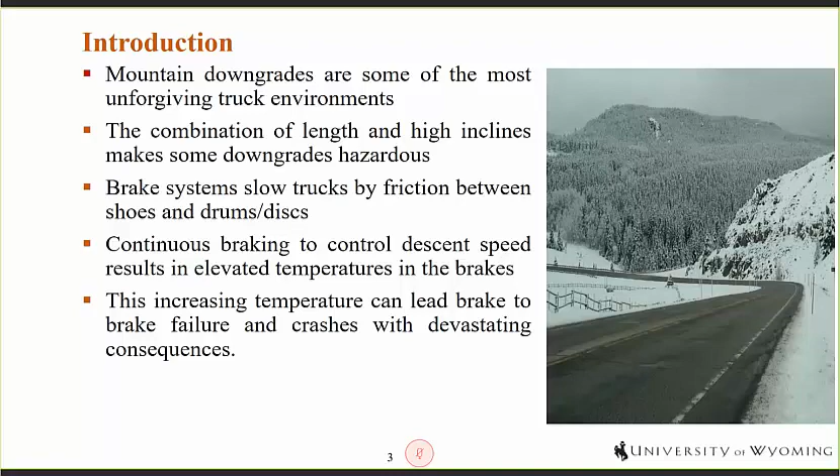To dissipate the energy which comes about as the truck is moving, brakes have to slow the trucks down using friction. So they convert kinetic energy, which is converted to heat energy and dissipated into the environment. However, this continuous braking results in very high temperatures for the brake systems, and this has the potential to lead to brake failure, due to the brakes heating to such an extent that braking capacity is totally lost. Crashes resulting from brake failure on steep downgrades are known as runaway crashes, and they are often devastating.

So this is an example of a runaway crash. This happened in China. Here you can see that the truck has lost complete control. The driver is no longer in control of the truck, and this crash led to the death of 5 people. Our research is aimed at preventing these sorts of runaway crashes.

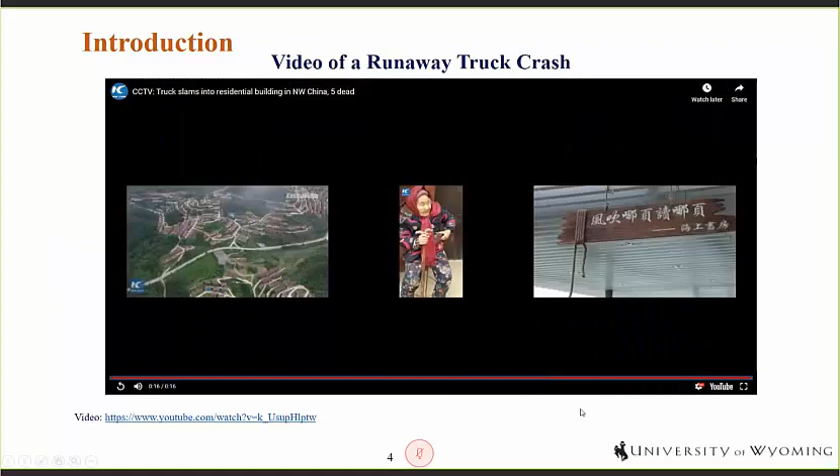So here in the US, there have been recent runaway crashes. On April 25th this year, there was a runaway crash in Denver, close to Lakewood. This crash resulted in the death of 4 people. A 23-year-old driver who was driving a semi-trailer lost his brakes, and the truck gained a speed of 85 miles an hour in a 45 miles an hour speed zone. There was a slowdown of vehicles, unfortunately, and this truck crashed into the traffic, and there was a 28-vehicle pileup leading to the death of 4 people.

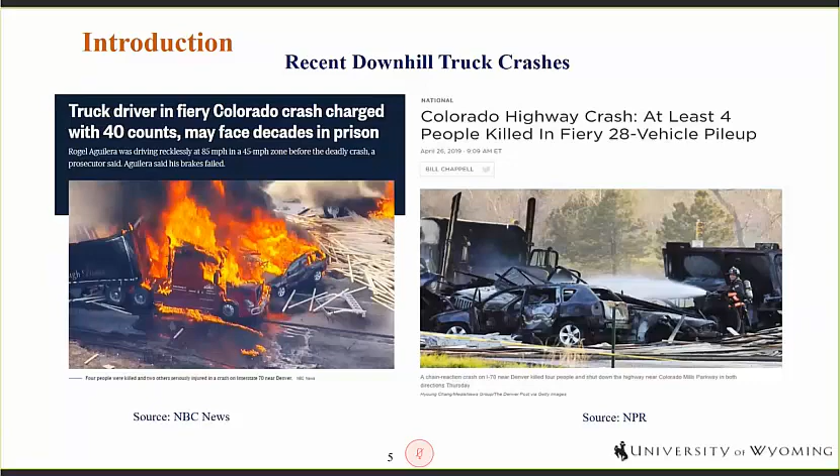In Wyoming, on October 1st this year, there was another crash. A truck coming from Idaho loaded with potatoes and onions lost his brakes. Unfortunately, the driver couldn't use the gravel ramp, neither could he use the cable catch net system because it was under repairs. So the driver crashed into a WYDOT sand shed. The cab of the truck detached. Fortunately, the driver sustained minor injuries. There were no fatalities in this incident.

You can also see another crash, of a tanker that rolled over on US 14A. That was some years ago. Also this year, you had 2 semi-trailer crashes in Woods Landing in Wyoming, and this happened within a space of a month, and the second semi-trailer crash led to the death of a driver. So what I'm trying to show here is that runaway truck crashes are often devastating. They have a very bad impact on lives and property.

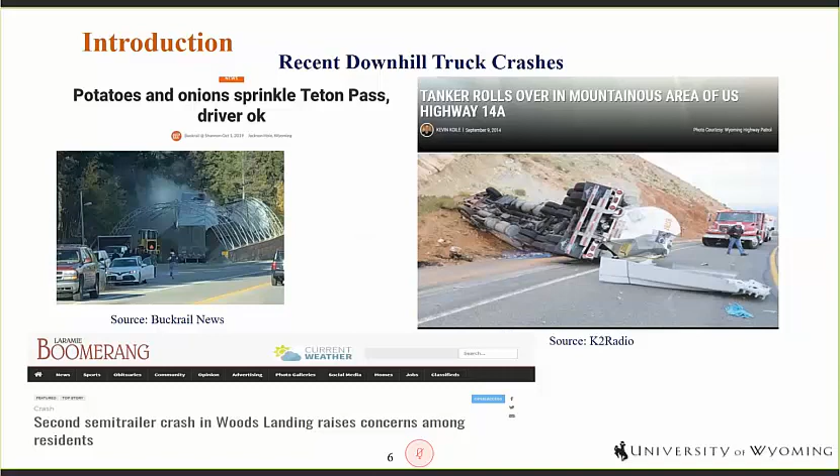Trucks have a peculiar problem when they descend steep downgrades.

High temperatures increase the risk of brake failure. These temperatures cause drums to expand—this is for drum brakes. So you have the drums expanding, becoming distorted in shape. The outer part of the drum expands so much that the drum takes on the shape of a bell.

This is known as bell mouthing. And as this distortion continues, the available distance for the brake lining and brake shoe to travel increases. This means there isn't great contact between the brakes and the drum surface, meaning there's a loss of braking efficiency as this continues.

This phenomenon is known as brake fade. And as brake fade continues, the truck gains speed, which becomes uncontrollable, and a total loss of control may occur, just like what you saw in the video—those sort of bad runaway crashes.

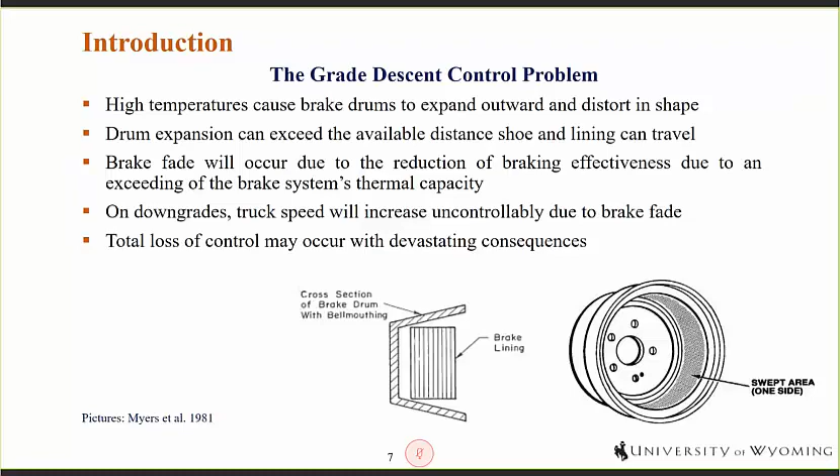So to counter the incidence of truck runaways on downgrades, grade rating systems have been developed since the 1950s. What these systems are meant to do is inform drivers of upcoming severe grades, and enable drivers to modify their behavior, such as selecting low gears and appropriate speeds to descend these steep downgrades.

Previous rating systems have included the Bureau of Public Roads rating system developed in the 1950s, the Hyke's grade rating system developed in 1963, and the Lill's grade rating system developed in 1975.

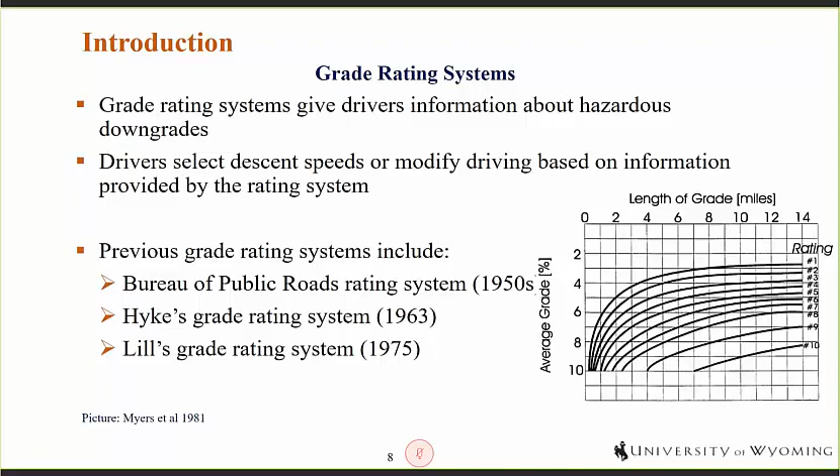However, some of these previous rating systems were considered to be arbitrary, and variations within grade categories created confusion among drivers. Important variables such as initial brake temperatures, ambient temperatures, and heating and cooling characteristics of the brakes were not considered in some of these systems.

And for a lot of the previous rating systems, drivers were still required to use their experience to safely travel over steep downgrades.

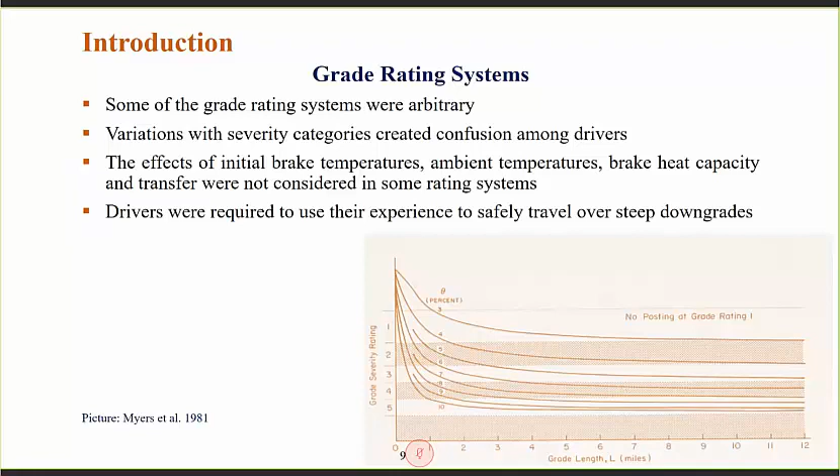So in the late 1970s, the Federal Highway Administration initiated a research project to develop a grade severity rating system. This rating system used a...

related brake temperature to the speed of a representative truck, such that when a truck chooses a particular speed and descends a steep downgrade, at any point within the downgrade it will still have enough braking capacity to safely descend that downgrade. This was accomplished through the use of weight-specific speed signs.

Importantly, this GSRS model considered truck weight, the physical characteristics of the downgrade, and the heating and cooling characteristics of the truck brake system. It also considered environmental conditions which would affect the brake system temperature.

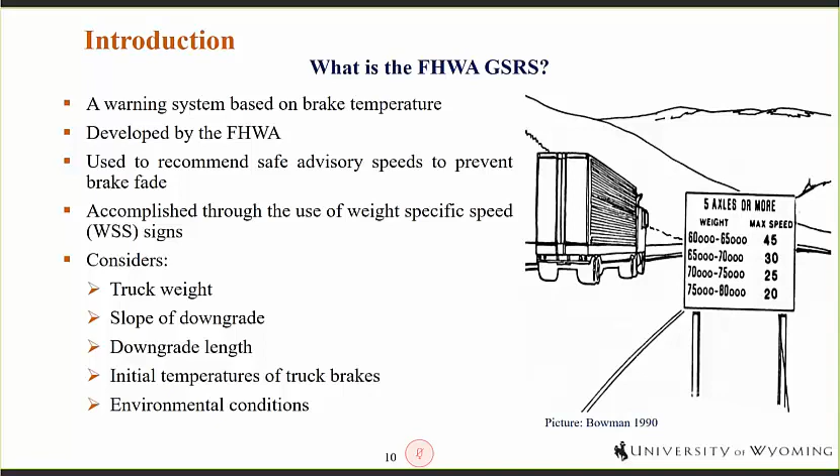However, in the intervening decades since the GSRS was developed, efforts to conserve fuel and reduce gas emissions have led to radical changes in truck designs. Right now trucks are more streamlined.

They have reduced frontal areas. They also have lower rolling resistance due to the change from bias ply to radial tires. They also have lower engine friction.

What this means is that retardant forces which were available to trucks in the 1970s and 80s have now been reduced substantially, to a point that the brakes have to do a lot more of the work.

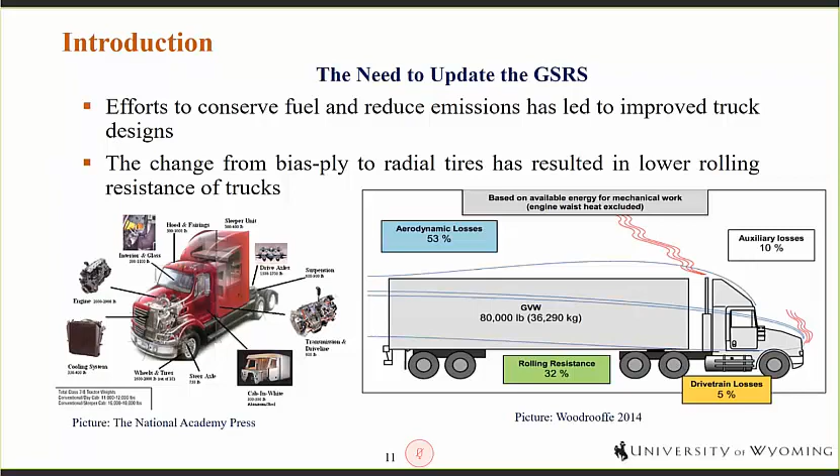On the other side, truck brakes have been enhanced due to the federal reduced stopping distance mandate. This mandate required trucks to reduce their stopping distances by up to 30% for new models of trucks by the year 2013.

Also, engine horsepower and braking forces from truck engines have increased over the decades. They are now between 400 to 550 horsepower. At the time the grade severity rating system was developed in the 1980s, the retardant horsepower was about 170. Right now you have retardant horsepower which could be as high as the thrust horsepower of these modern trucks.

So the objectives of the study. It is essential to know that this research was a comprehensive study of mountain pass safety in Wyoming. However, for this research I'm going to be focused mainly on updating the GSRS.

Our first objective was to update the GSRS to reflect current truck population characteristics and make recommendations for implementation. The second objective was to evaluate mountain passes and their warning systems with regards to downgrade truck crashes. For this presentation I'll give highlights about our findings for the second objective, but I'm not going to go so deep into it.

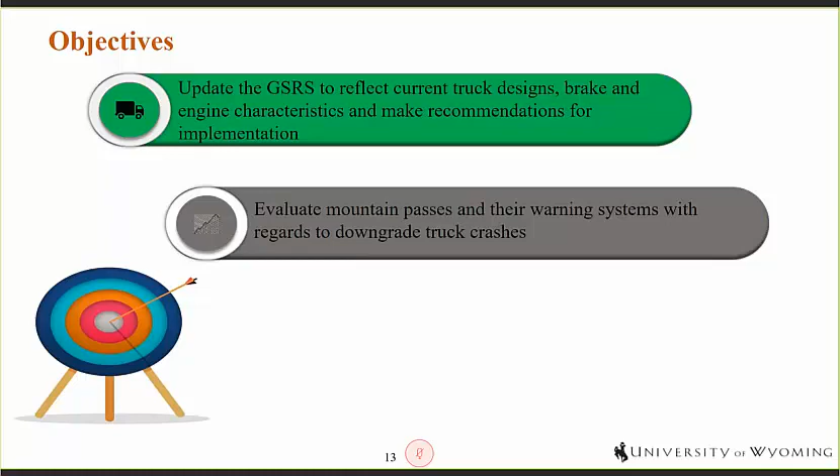So to the research task. First, we had to select a representative truck. We had to develop a testing protocol for field testing, instrumenting the test truck, undertaking the field test, and updating the GSRS to determine maximum descent speeds and make recommendations for implementation.

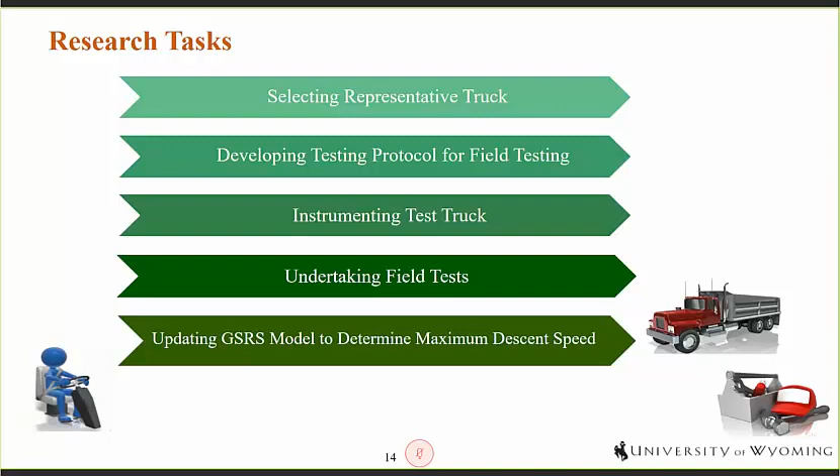So to the first task, selecting a representative truck. We selected a single trailer 5-axle truck. This choice was made because this truck configuration represents about 60% of trucks on US highways currently.

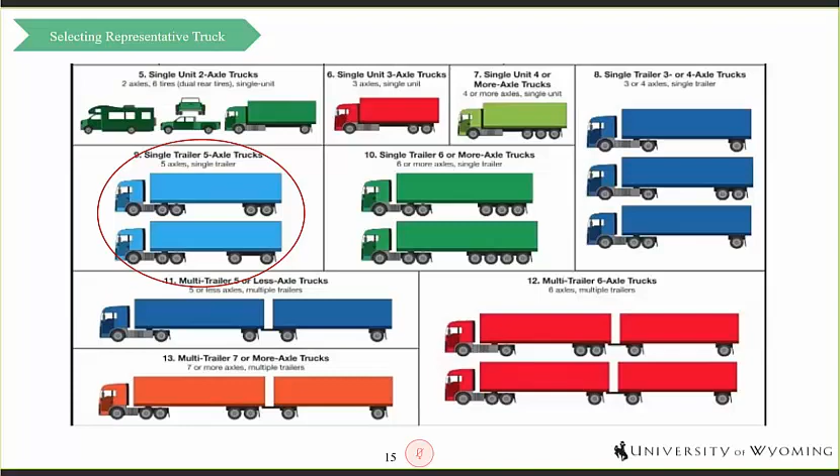Our test truck was a Kenworth T680 series, 2016 model, with a 13-speed transmission. The trailer was a Hyundai trailer van with a gross vehicle weight rating of 65,000 pounds. The test engine was a Cummins ISX-15 engine, 2013 model, with a horsepower of 550.

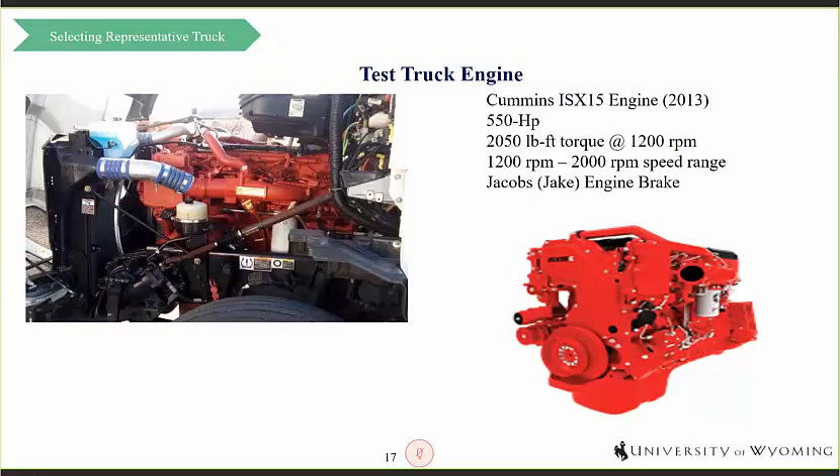The operating speed range was 1,200 to 2,000 RPM, and it was fitted with the compression engine brake, also known as the Jake engine brake. The truck was fitted with Bendix air disc front brakes for the steer axle. All the other wheels had Castlite S-cam drum brakes for both the tractor and the trailer.

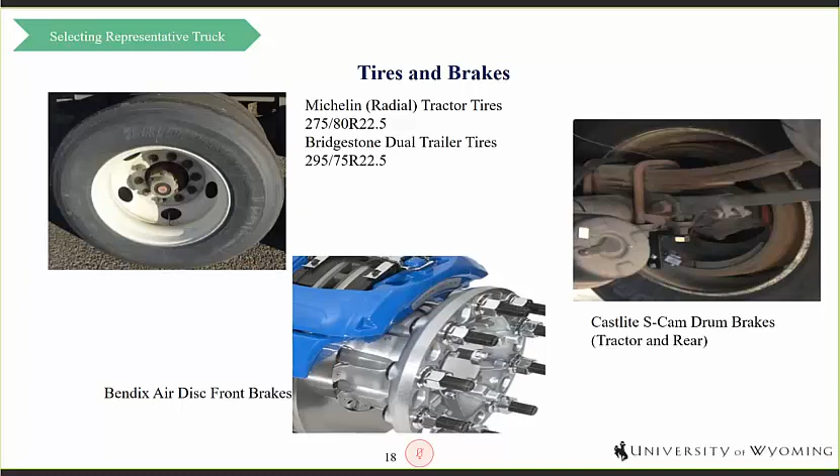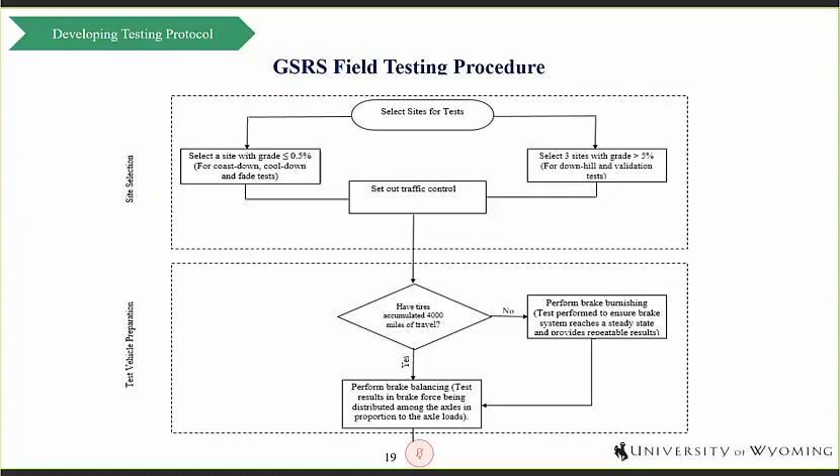So to the testing protocol. We developed a testing protocol to guide us during our testing procedure. This included procedures for site selection, test vehicle preparation, and the actual test procedure. I'll talk about the test procedures in a moment.

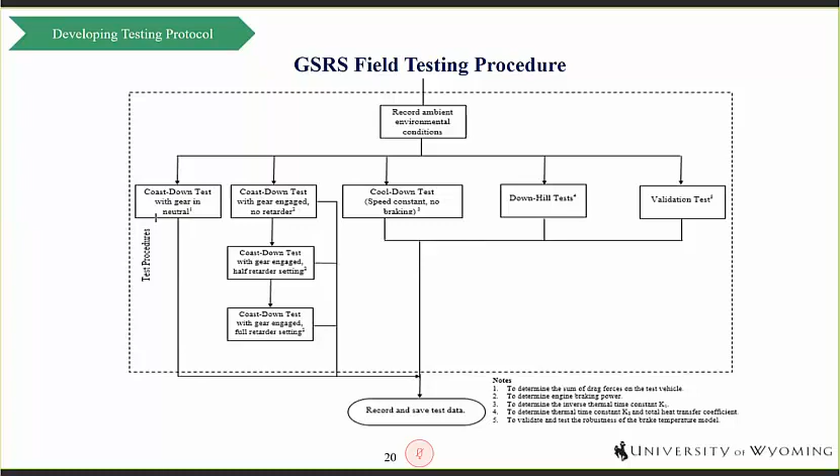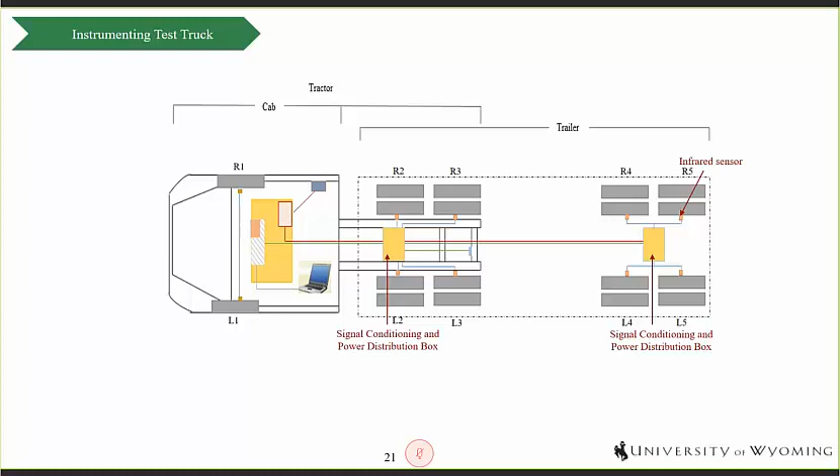To instrument the test truck, we installed infrared sensors on all 10 brakes. We also installed signal conditioning and power distribution boxes on the tractor and the trailer. What these were meant to do was collect information from the infrared sensors and also deliver power to these sensors.

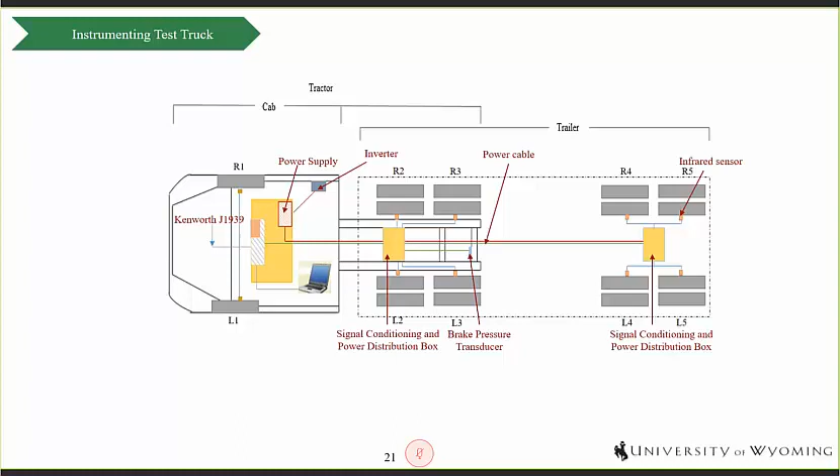There was another conditioning box in the cab, and power supply was provided by the truck. There was also communication with the truck engine to get some important variables, and a brake pressure transducer to measure the application pressure during the test.

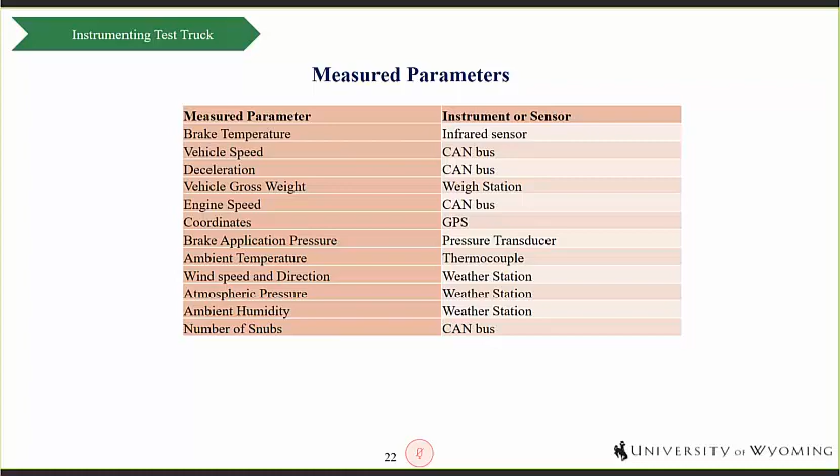So all the data was collected to the controller box in the cab, and this was connected to a laptop running proprietary software where we collected all the data. These are the parameters we measured during the test: brake temperature, vehicle speed, deceleration, gross vehicle weight, engine speed, GPS coordinates, brake application pressure, environmental conditions, and number of snubs.

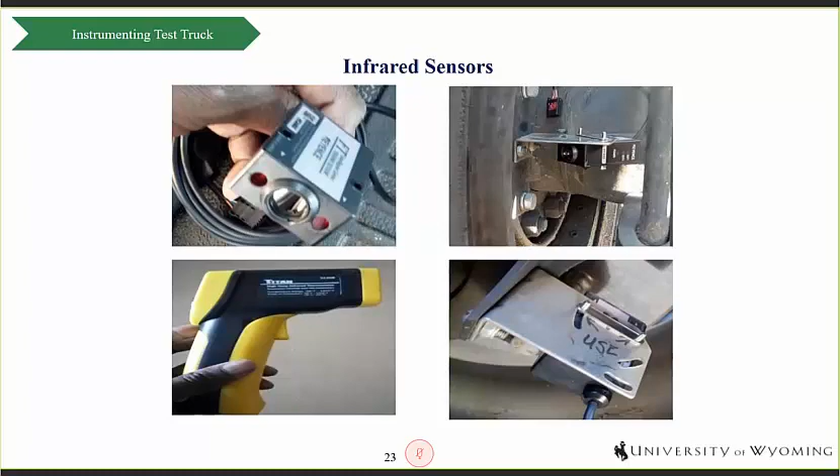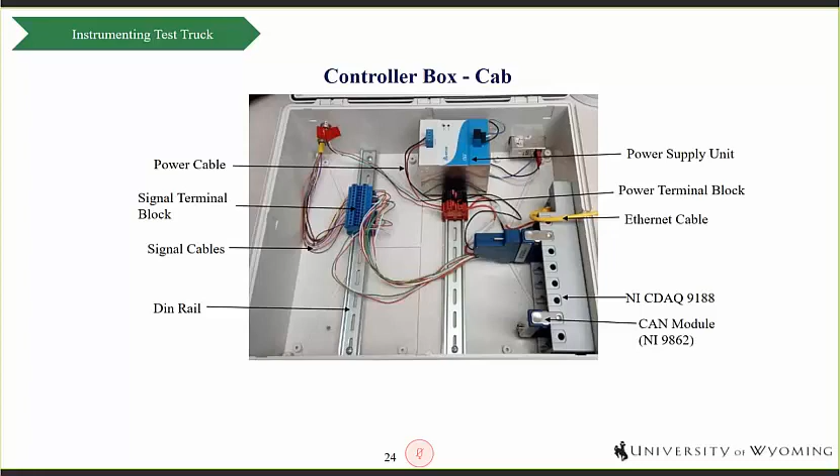Here on this slide you see the infrared sensors. We also had a handheld sensor to first calibrate the sensors and validate readings from them during the test. This is the controller box installed in the cab, which collected data from the signal conditioning and power distribution boxes on the tractor and the trailer. This is the signal conditioning and power distribution box installed on the tractor.

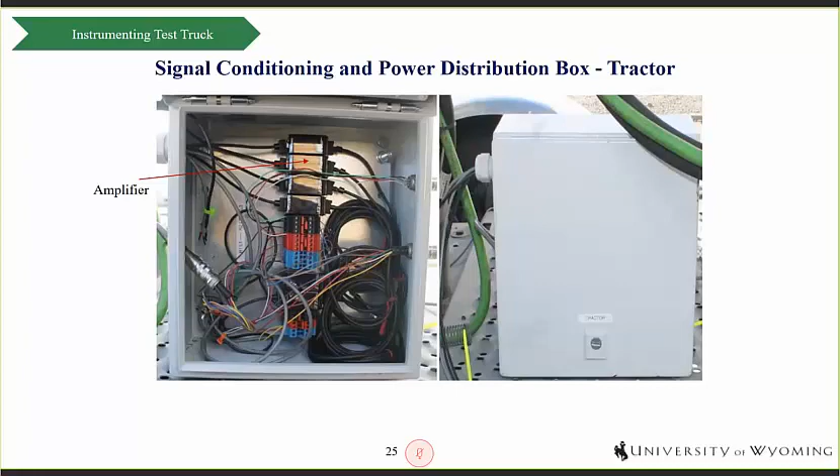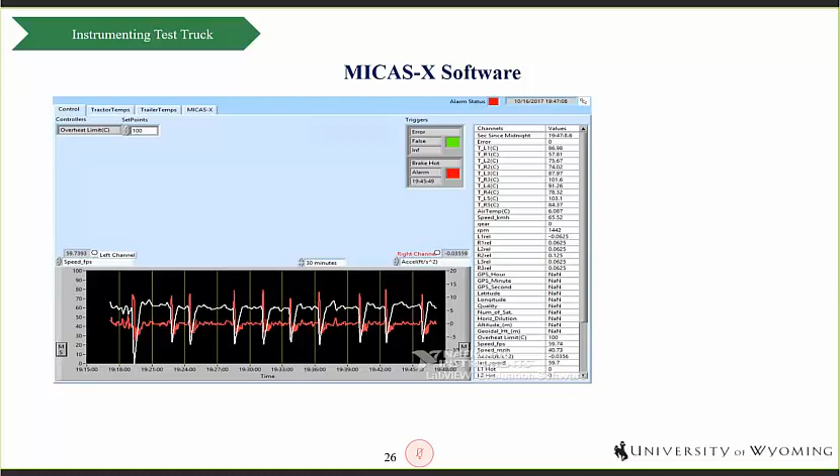And this is the laptop running the MICAS-X software, a proprietary software. It allowed us to see different parameters as the test was carried out. On this slide we could see the speed and the acceleration of the truck in real time during the test. And here we could also see the brake temperature for ten of the brakes of the truck. For our loading, we used crates of water.

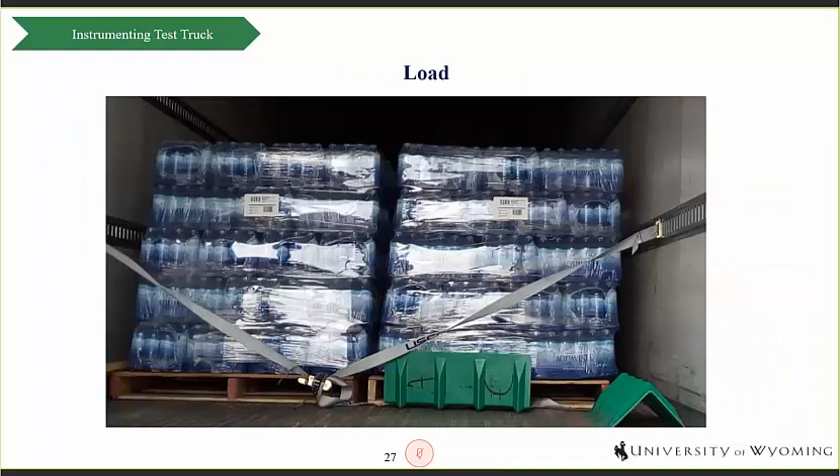So now to the field tests, updating the GSRS. We conducted 3 main tests: the coast down, cool down and hill descent tests. The coast down test was meant to measure the sum of the drag forces acting on the truck. The cool down tests were meant to measure the cooling characteristics of the truck. The hill descent tests were meant to define the heating characteristics of the truck.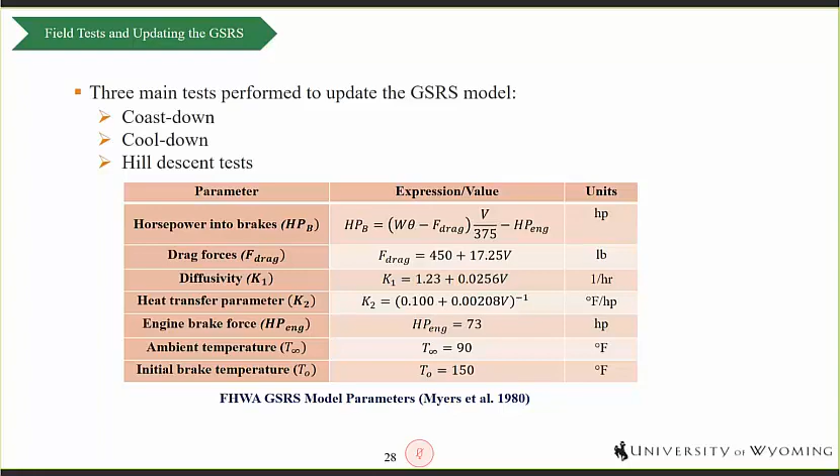Also on this slide, you see the GSRS model developed in 1980 by the FHWA. These are the model parameters we updated in this research.

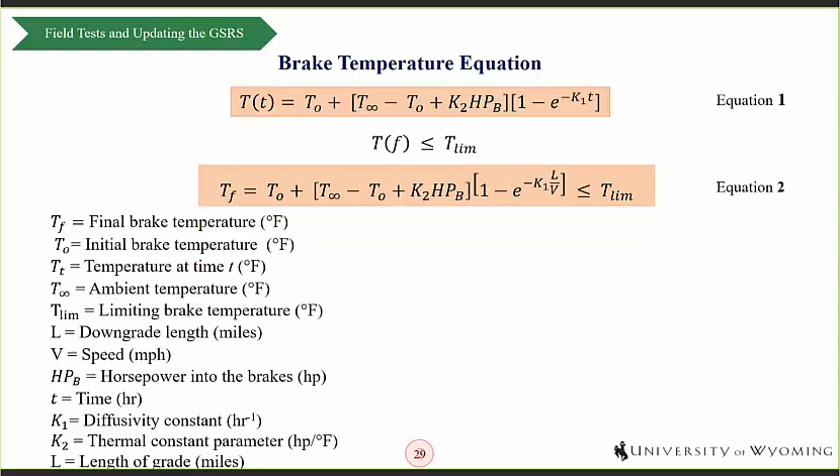Before we proceed, I'd like to talk about the brake temperature equation. This equation relates brake system temperature to the speed of a truck. This temperature model is meant to define a certain speed such that the speed at the bottom of a downgrade always results in a brake system temperature less than or equal to a predefined limiting temperature, as defined in equation 2. That is the basic concept: defining a certain speed such that the brake system temperature never exceeds a certain predefined limiting temperature.

I also have to talk about the required braking force, an important concept in the GSRS model. Consider a truck of weight W on a grade of slope theta. If the truck is in motion, there are some drag forces acting on it: aerodynamic drag, powertrain drag, and rolling resistance drag. There's also drag from engine braking and resistance from the engine itself. These together are known as the non-brake forces.

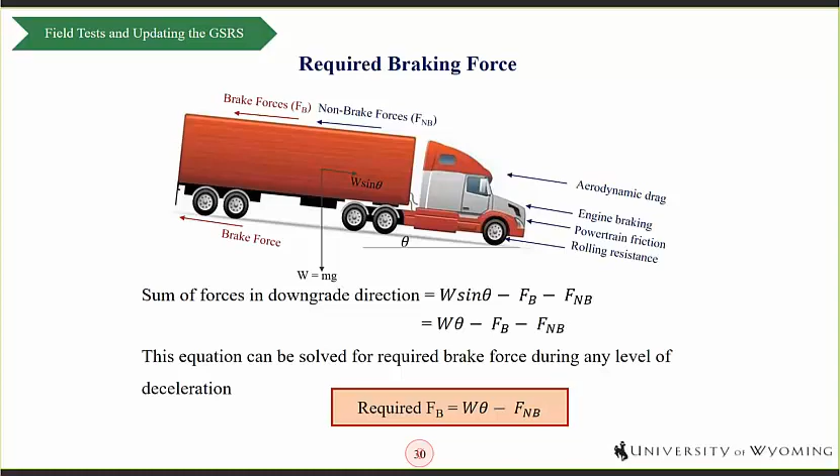To keep the truck at a controllable speed, the driver applies his brakes. This is known as the brake force. So if we sum forces in the downgrade direction, we have W theta minus the braking force minus the non-braking forces. From this we can derive an expression for the required braking force.

So now on to our first field test. The first test we conducted was the coast down test. As I mentioned previously, this was to determine the sum of the drag forces acting on the truck. We used field tests, and we also had to supplement this test with simulation tests, conducted according to the Society of Automotive Engineers J1263 and Environmental Protection Agency standards.

So two different tests were conducted. First, we conducted the tests to measure the sum of the drag forces, and also we had to define the engine power absorption characteristics of the truck.

So with the coast down test, what is done is the truck is driven to a predefined speed on level ground. The truck is put in neutral, and then it is allowed to coast to a stop from the predefined speed. The gear is in neutral to measure the sum of the drag forces, and to measure the engine power absorption characteristics, the engine brake is engaged along with the truck gears for this second test.

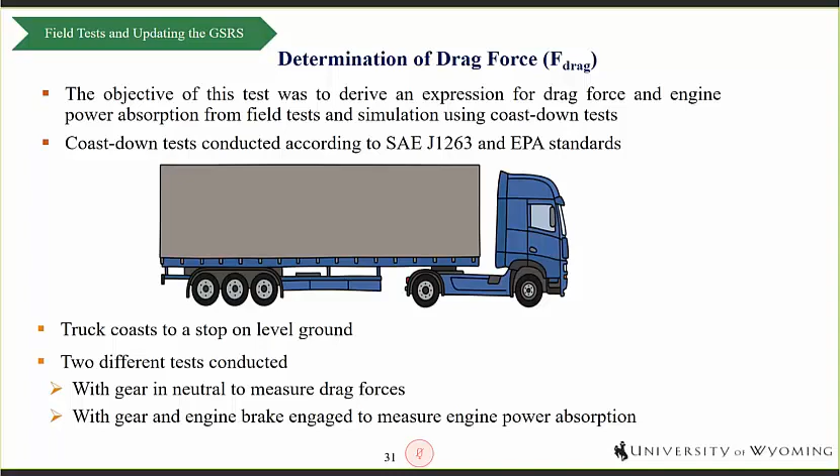So the drag force is calculated according to Newton's law of motion. This equation is modified to account for the effective mass of the truck, and to also account for the slope of the test track. These are regressed against drag coefficients A sub m and D.

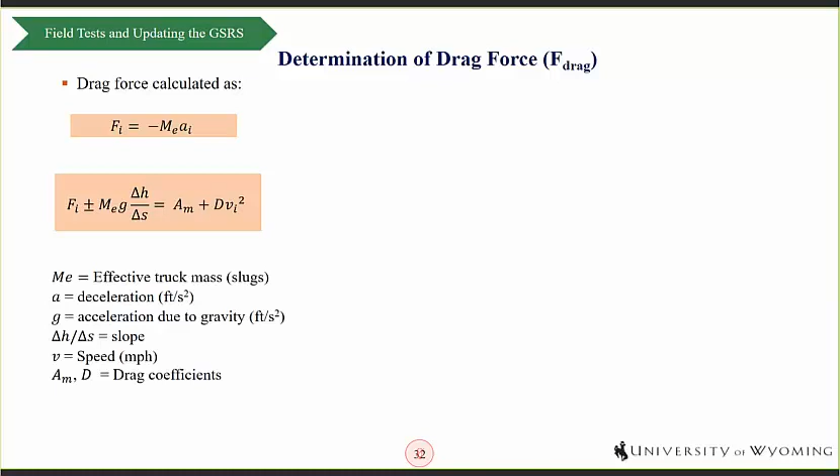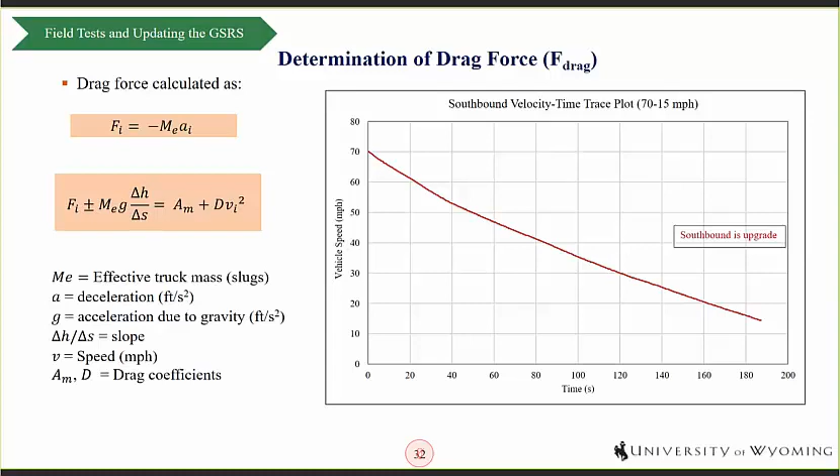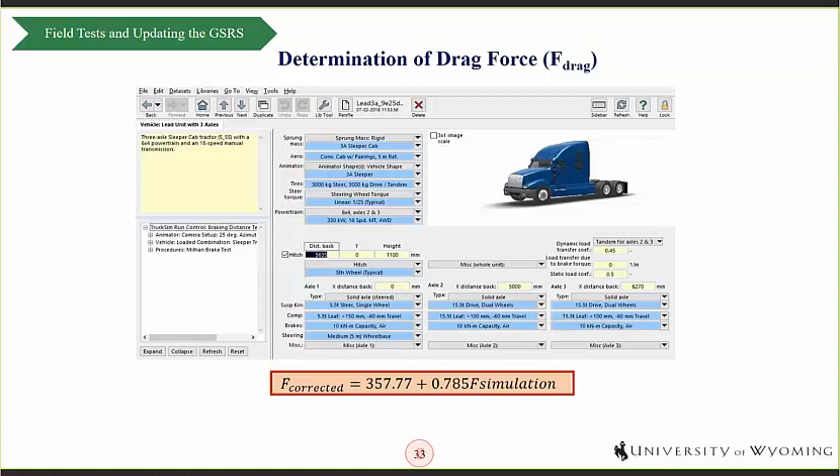So here on the slide, you see an example of a velocity time trace plot of one of our coast down runs. Like I mentioned previously, we had to use simulation software to augment tests from the field. This was because in some cases, environmental conditions, the wind speed just didn't allow us to conduct our tests. So we used our simulation, and we developed a correlation between the field test and the simulation.

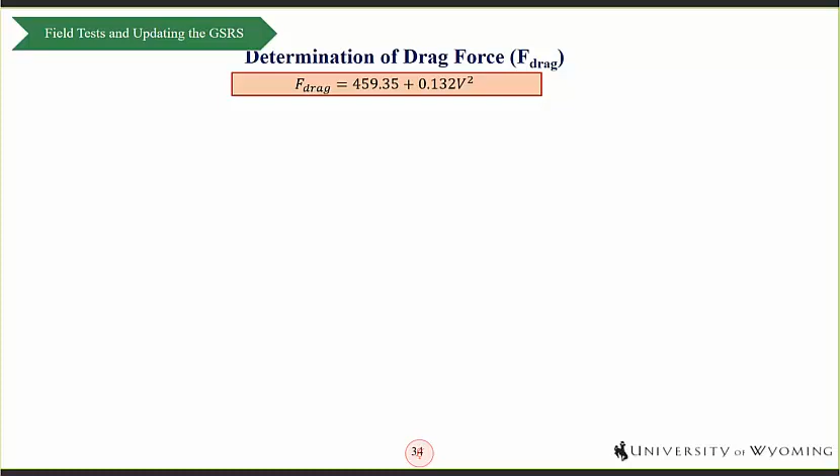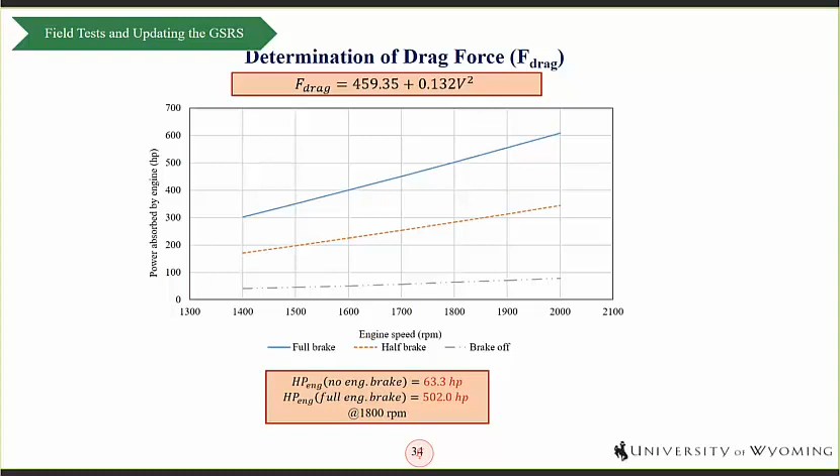So this was the overall drag force expressed in terms of vehicle speed. What we found was that when no compression brake was engaged, the braking horsepower was 63.3 from the engine. At full engine brake, the retarding horsepower was 502, measured at 1,800 RPM of engine speed.

The second parameter we estimated was the diffusivity parameter, also referred to as K1. This was estimated using cool-down tests. Like I mentioned previously, the diffusivity parameter defines the cooling characteristics of the brakes, and this is also derived according to Newton's law of cooling.

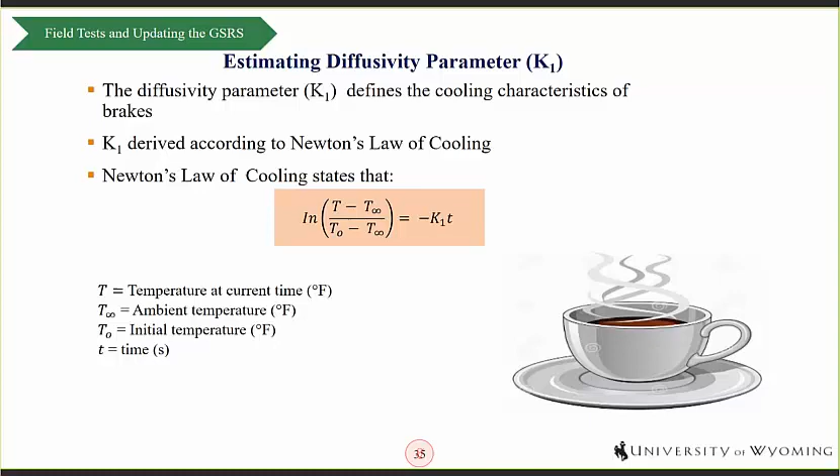Newton's law of cooling defines the relationship between a body's heat loss and its surroundings, and is expressed as the equation you see above. So from the equation, it implies that a plot of the natural log of temperature against time should result in a graph with the parameter minus K1 as the slope of this graph.

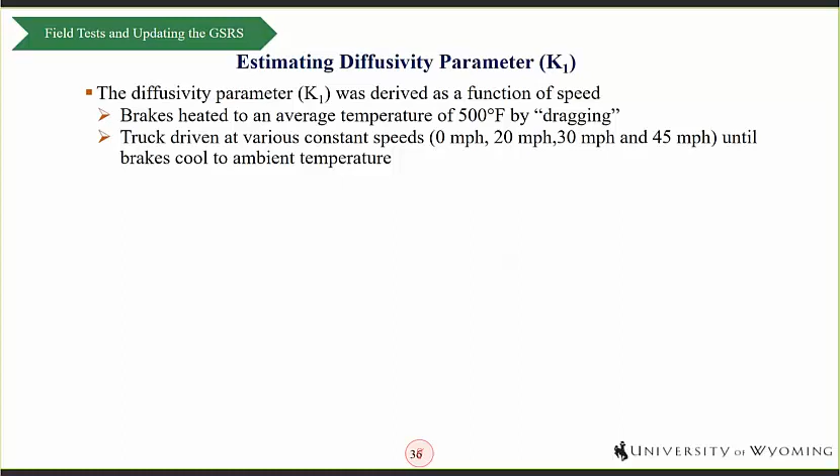So to conduct the cool down test, we drove the truck and heated its brakes by dragging to an average temperature of 500 degrees Fahrenheit. We then drove the truck at various speeds, 0, 20, 30, and 45 miles an hour to allow the brakes to cool to ambient temperature. Then we plotted the natural log of heat loss against time for the brakes at different temperatures.

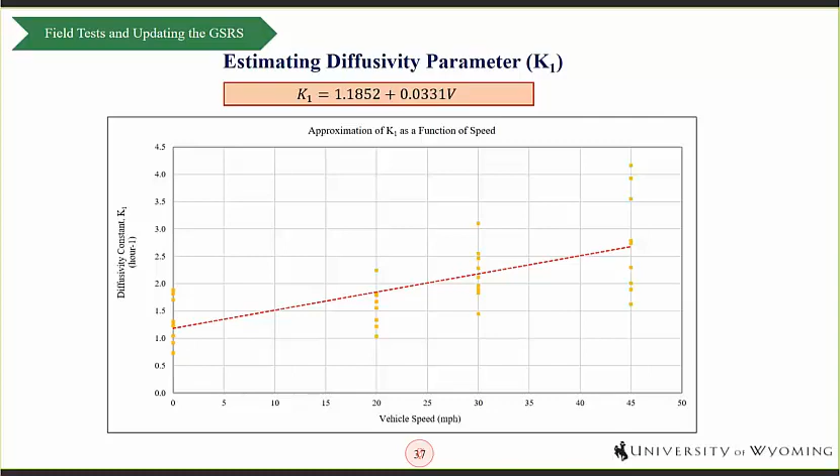The final parameter we had to estimate was the heating parameter, referred to as K2. This was extracted from the hill descent test. We used the hill descent test to correlate brake temperature with the horsepower absorbed during a grade descent.

We achieved this correlation by rearranging the terms of the brake temperature equation such that we have the thermodynamic variables on one side and the retarding force on the other side. The thermodynamic variables we refer to as T asterisk. And also, if you remember, I gave a definition for the required braking horsepower, the required braking force, in one of the earlier slides. The required braking force times the speed of the truck should be the horsepower into the brake. So a plot of T asterisk, representing the thermodynamic variables, against horsepower into the brakes, should result in a graph with a slope of the heating parameter K2.

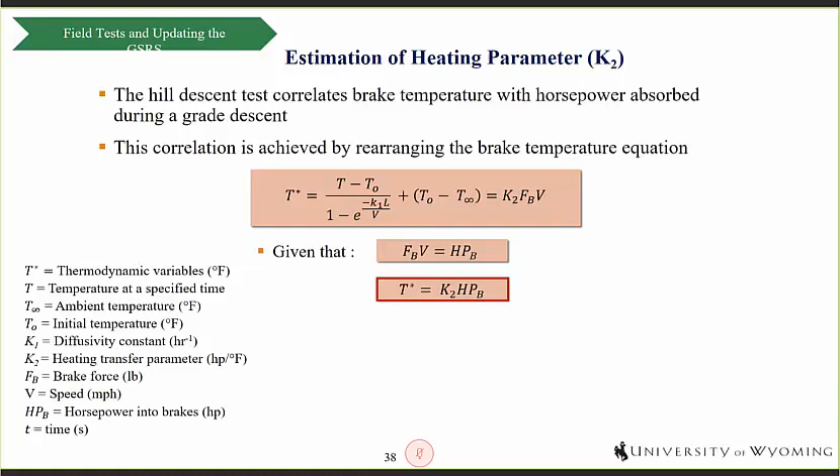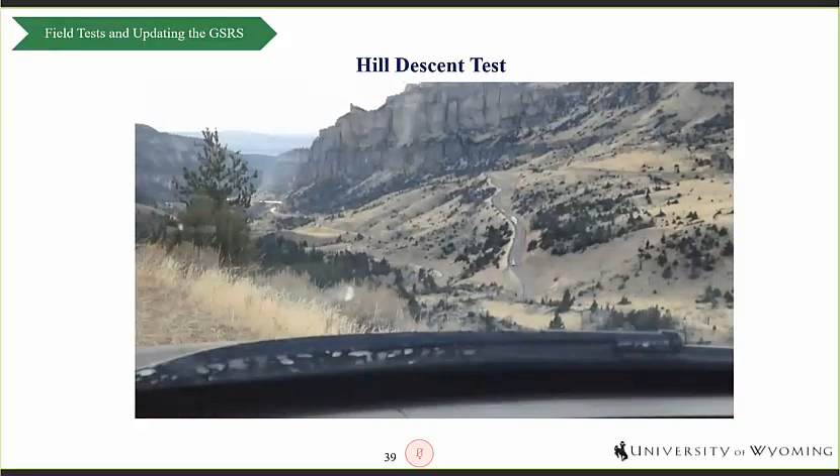So on this slide, I want to show you a hill descent test, one of the hill descent tests. Here you see the truck descending a grade at a constant speed, and you have the pace vehicles providing traffic control. This downgrade leads to Ten Sleep, on the western face of US 16.

This leads to Worland, close to the little town of Ten Sleep.

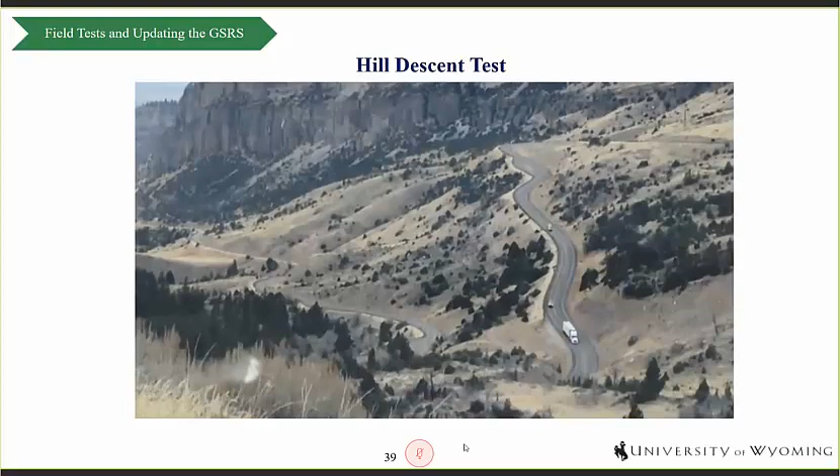So we descended different hills at constant speeds by modulating the brake pressure. We conducted a test for different speeds, and we also used the retarder settings to simulate changes in the weight of the truck. This was done to speed up the test process.

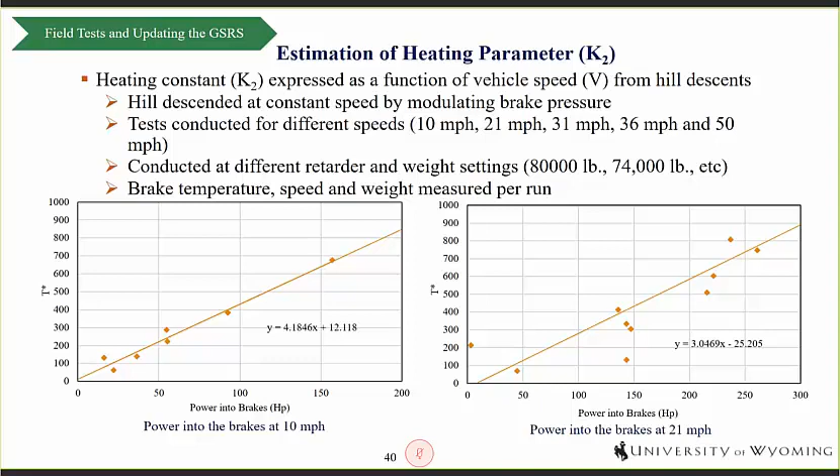Here on this slide, you see a plot of T asterisks representing the thermodynamic variables against horsepower into the brakes at 10 miles an hour and at 21 miles an hour. So we did this at different speeds, and we derived an expression for the brake system in terms of K2. That is the expression on the slide.

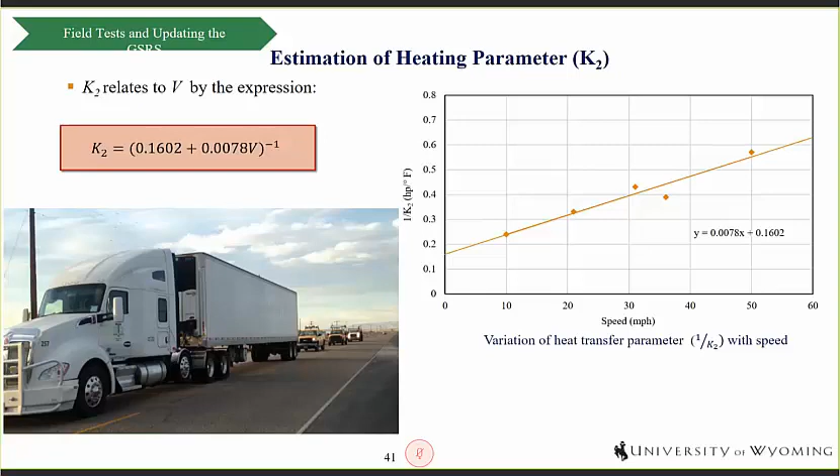So what we can do is for defined maximum descent speeds V, we could estimate what the downgrade length should be.

It is also important to note that for our updated model, the limiting temperature is the sum of two temperatures: the temperature from a steady descent of the grade, referred to as TF, and the temperature rise from an emergency stop.

For our study, we used a limiting temperature of 500 degrees Fahrenheit. This was because of the reasonableness of the speeds derived, and also to represent the general fade temperature for brake linings we had on our truck.

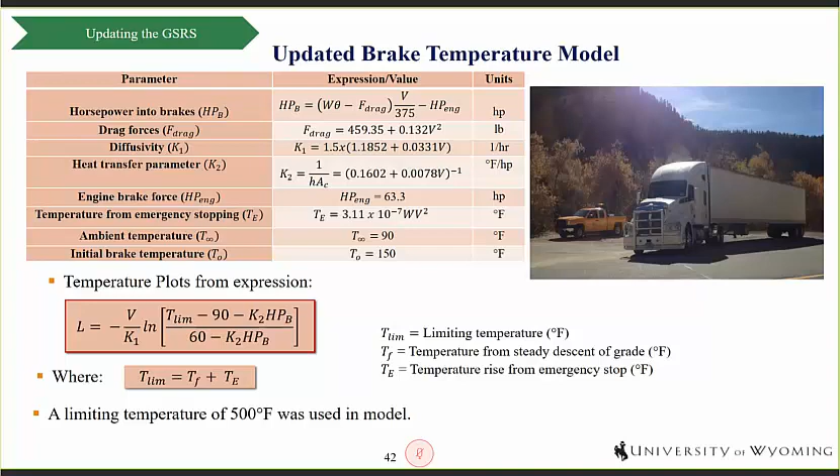That is how we use the maximum safe descent speed plots.

We also conducted a validation test to check the robustness of our model, and this was done on the eastern face of US 16 from milepost 67.4 to 73.9. What this was,

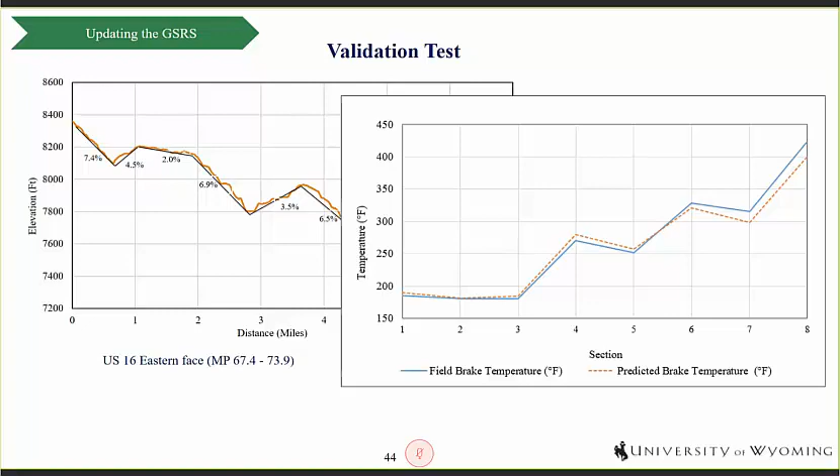Okay, so that brings me to the end of the tests conducted to update the GSRS. Now I'll talk to you briefly about the safety effectiveness of downgrade warning signs. This was with respect to our second objective.

So we conducted some analysis to evaluate safety effectiveness of downgrade warning signs in preventing truck crashes. We conducted an overall analysis and an individual analysis of warning sign effectiveness. We used propensity scores and cross-sectional analysis methods.

Overall, what we found was that the probability of a downgrade truck crash occurring on sections without downgrade warning signs was 15% higher in comparison to those sections with warning signs.

We found that truck escape ramp signs, hill signs, directional and speed signs, chevron signs, trucker warning signs, and some other miscellaneous downgrade signs were effective in reducing crash frequency. So these are some of the warning signs we found to be effective: truck escape ramp, hill sign, directional and speed sign, chevron, trucker warning sign, and some miscellaneous downgrade signs.

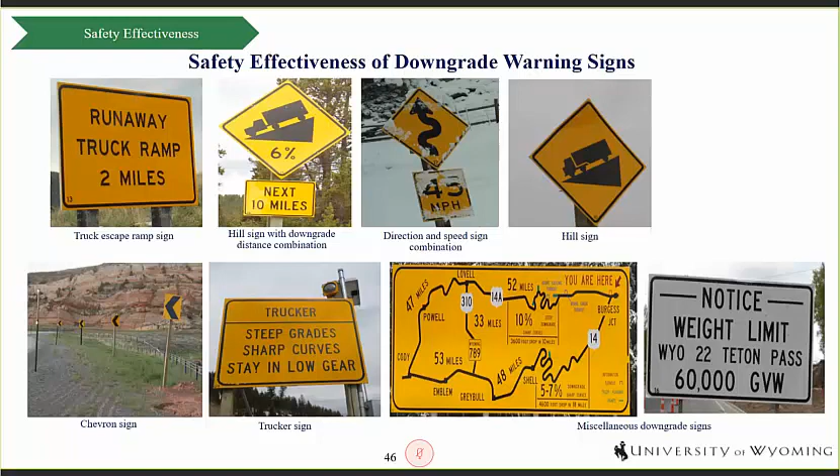We also looked at the application of intelligent transportation system technologies in improving mountain pass safety. Some of these applications are already in use, others are potential applications. We looked at thermal imaging of brakes, dynamic truck curve warning system, downhill truck warning system. The curve warning system and the truck warning system are already in place and already in use.

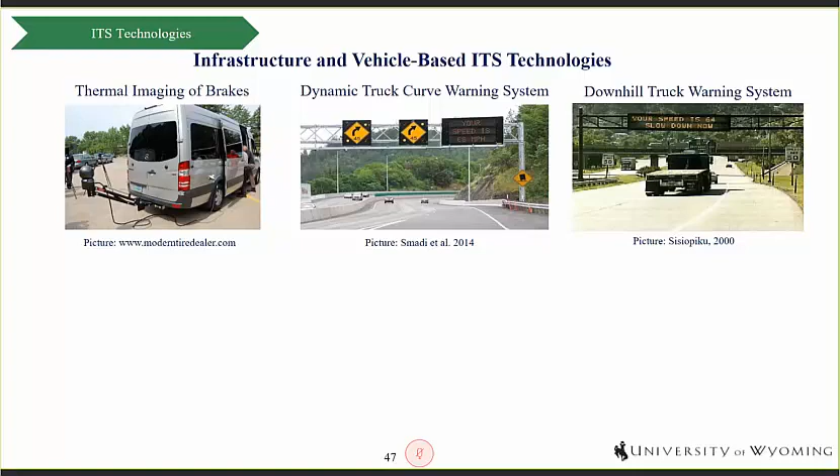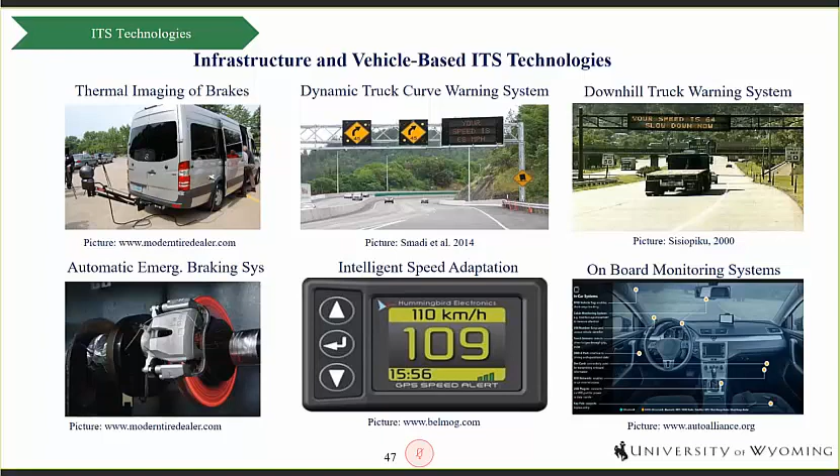We also looked at some vehicle-based systems, including automatic emergency braking systems and intelligent speed adaptation on-board truck systems. And then we also looked at potential applications of connected vehicle technologies in improving mountain pass safety. These include reduced speed zone warning, spot weather impact warning, and size vehicle warning. We should note that a lot of these technologies are still several years away from being developed or being implemented.

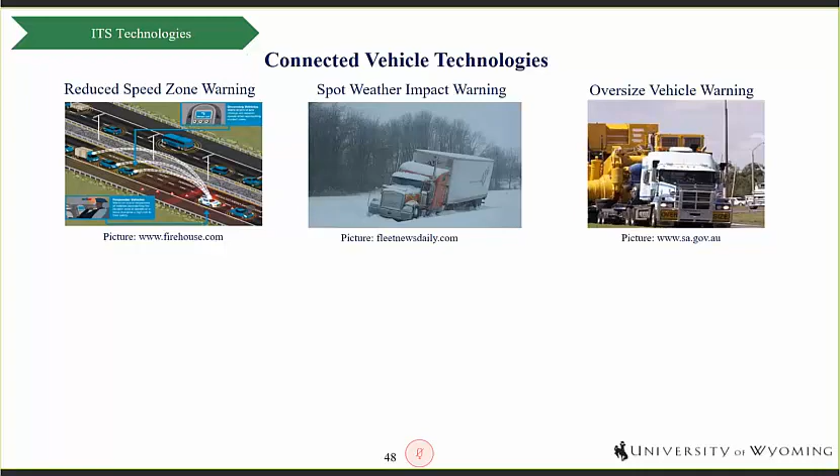Vehicle-based systems included in-vehicle signage, control loss warning, and forward collision warning.

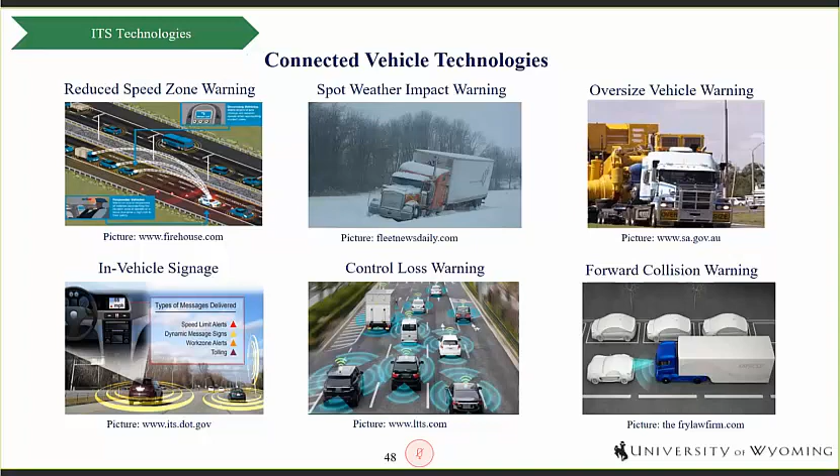Our findings and recommendations from this research have been presented in two reports, submitted to the Wyoming Department of Transportation in two volumes. Volume 1 is currently online and can be downloaded, but volume 2 has not been uploaded yet. Anyone interested in any volume of this report can contact the WY Research Office to purchase a copy.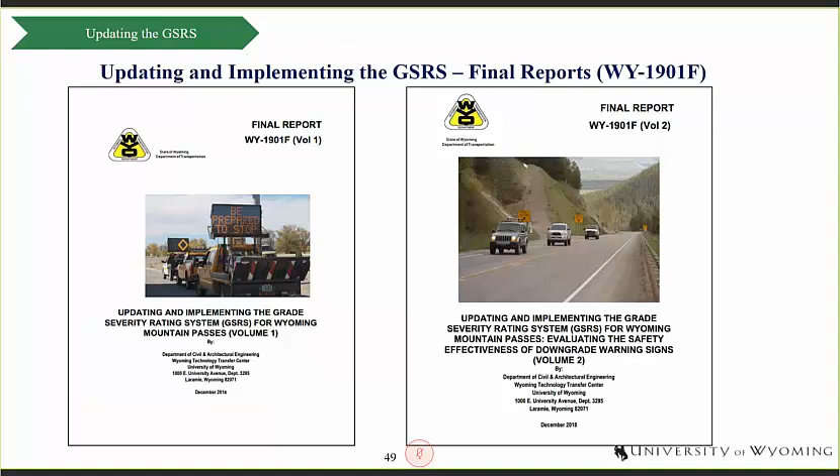Now to the formulation of weight-specific speed signs. I should also mention that a user's manual for the updated GSRS has been written and is currently in possession of, and has been submitted to, WYDOT. I'll take you through an example of the formulation of weight-specific speed signs at this point.

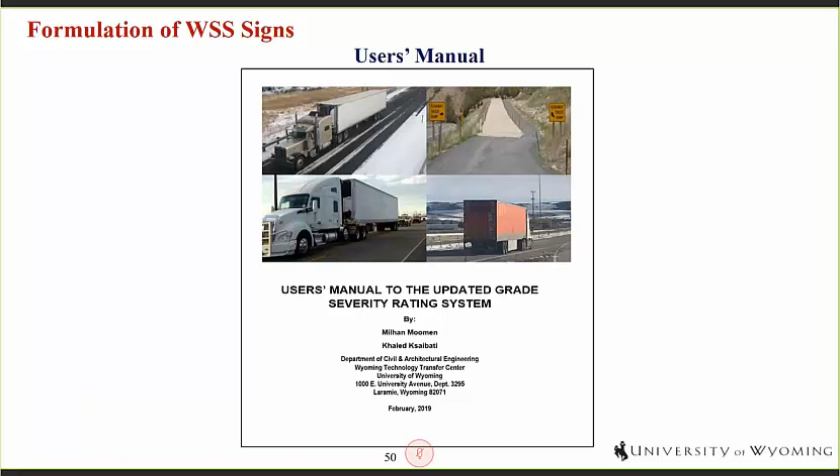There are some activities the engineer must first undertake to derive maximum descent speeds and formulate these weight-specific speed signs. First, the engineer has to identify potential sites in need of weight-specific speed signing. This involves analysis of truck crash data, traffic data, geometric data, and police records to identify hazardous locations that may benefit from installation of weight-specific speed signs.

After these candidate sites have been identified, the engineer has to perform a field inspection to verify the downgrade percent, the length of the downgrade, the truck braking length, and traffic control types at these sites. The third step is to determine the grade severity using our updated model, estimating maximum safe descent speeds for different truck weight categories using the grade percent and truck braking length.

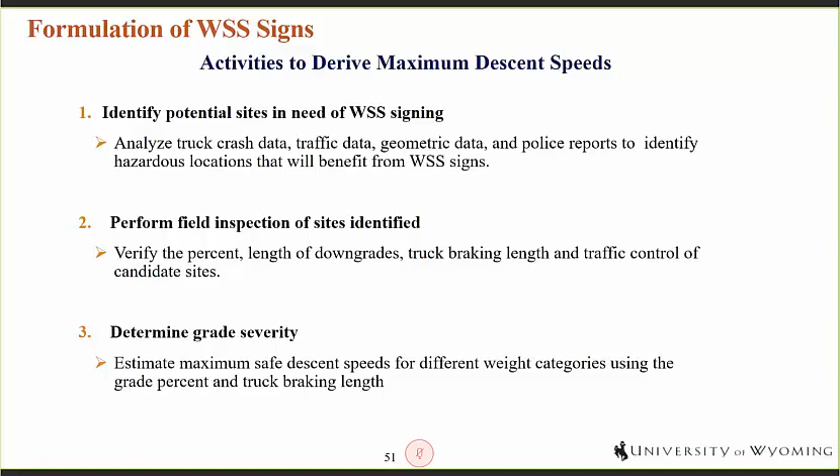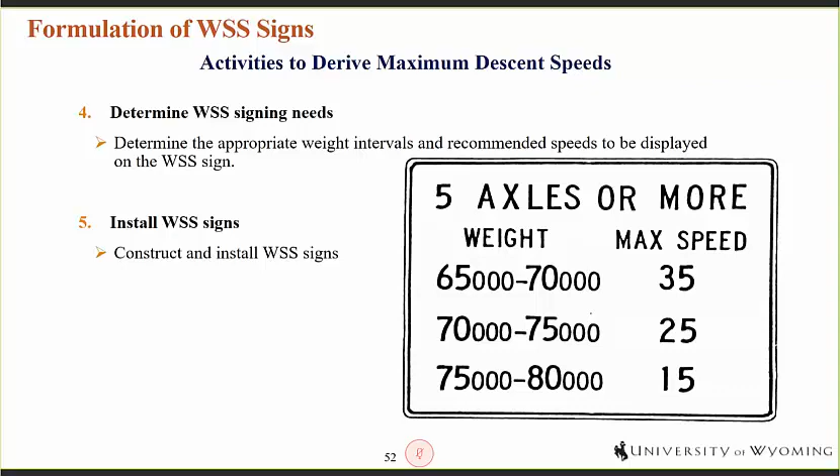The fourth step is to determine the weight-specific speed signing needs, by determining the appropriate weight intervals and recommended speeds that have to be displayed on the weight-specific speed sign. The final step is to install the signs. These are the steps that have to be taken in actually formulating the weight-specific speed signs.

Also, the engineer has to determine the lowest weight at which the truck can travel at the speed limit of the roadway under consideration. To do this, the engineer uses the maximum descent speed plots to determine the lowest weight at which the truck can travel at the maximum speed limit. This will become clearer as we go through the example.

The next step is to compute the number of weight intervals between the maximum weight limit and this lower weight limit, which we refer to as WL, the weight at which the truck can travel at the speed limit. The number of weight categories is determined as the difference between the maximum weight for the facility and that lower weight, divided by 5,000.

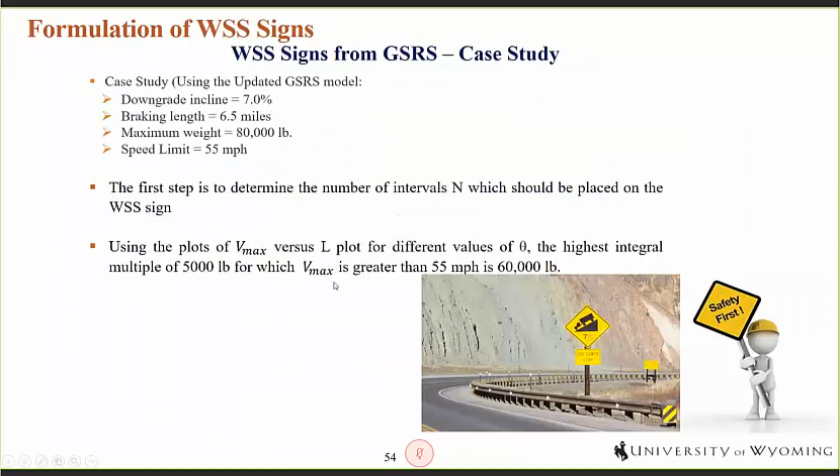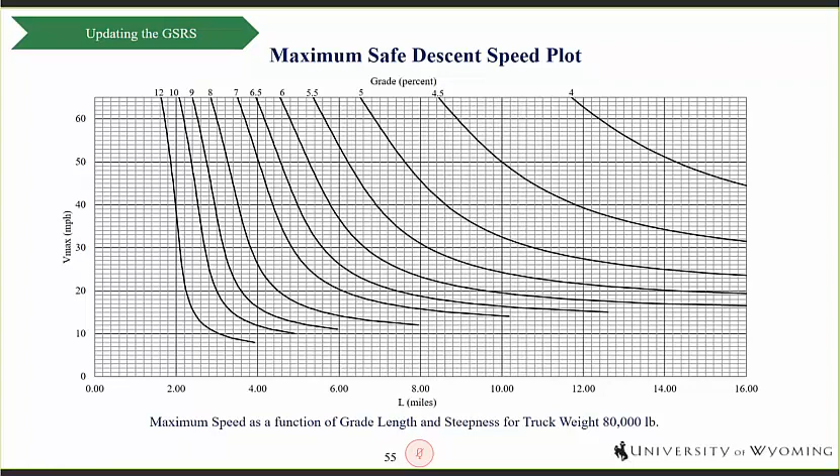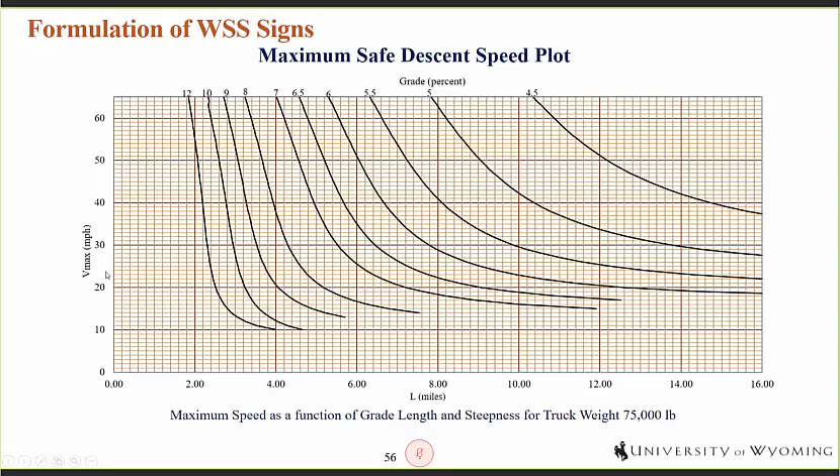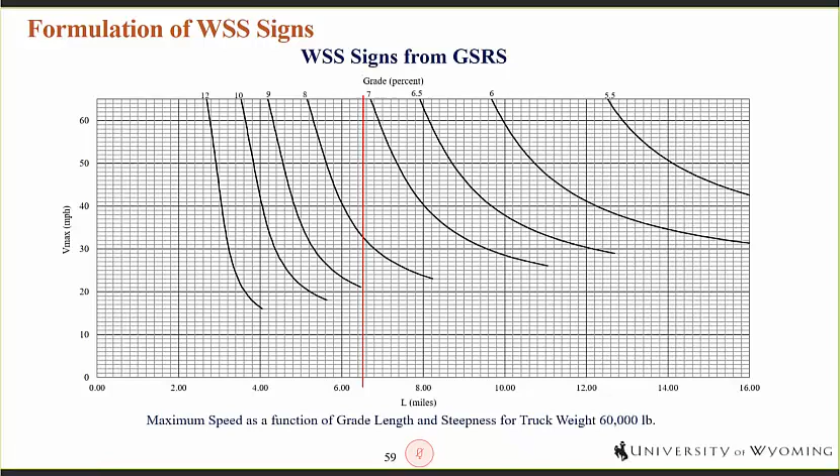If you remember, the number of weight categories is calculated as the difference between the maximum weight on that facility and the lower weight limit at which the truck can travel at the speed limit, divided by 5,000 pounds. So we have 4 categories. This implies that the number of weight categories we place on the WSS sign should be 4.

Also remember that if n is less than 5, the column of weight should be in 5,000 pound intervals. So for our scenario, the column of weight will begin with the lower weight limit, which is 60,000 pounds, and increase in 5,000 pound increments to 80,000 pounds.

So these are the maximum truck weights and corresponding speeds we derive from a maximum descent speed plot. So you have 80,000, 18 miles an hour; 75,000, 22; and so on and so forth. 60,000, 55 miles an hour.

So what we now do is place them in weight categories. Remember that because n is less than 5, the categories can be in 5,000 pound increments: 61 to 65,000, 66 to 70,000, 71 to 75,000, and 76 to 80,000. It is important to note that we do not repeat weight categories. So you have 65,000 pounds as the heavier weight category on this weight interval, but in the next weight interval we don't have 65,000, we have 66,000. This is to avoid confusion and simplify the task of reading the weight specific speed signs. So we put them in these categories.

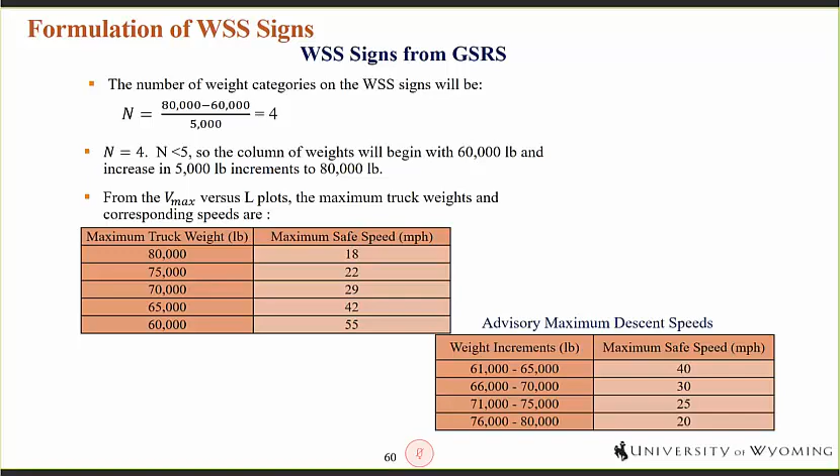I'm sure you have some questions, and maybe Chris will let us know as we move on. Now to the recommendations of the study.

We found that the GSRS model, if implemented, will enhance truck safety on Wyoming mountain passes. However, the maximum safe speeds displayed on the WSS sign cannot be currently enforced and are to be treated only as advisory speeds. This is because an enforcement officer can in no way tell the weight of the truck.

Also, drivers should be educated on the use of the GSRS and weight-specific speed signs. The education should focus on improving mountain driving for inexperienced drivers and for those who are unfamiliar with Wyoming's mountain passes. The trucking industry should be encouraged to adopt and install disc brakes.

This has been widely done in Europe, but the penetration of disc brakes in the US market has not been as fast as expected. Disc brakes are known to be resistant to brake fade, and their adoption will reduce the incidence of truck runaway crashes. Also, the GSRS, the weight-specific speed signs, will be meaningless if brake systems are not checked regularly and maintained.

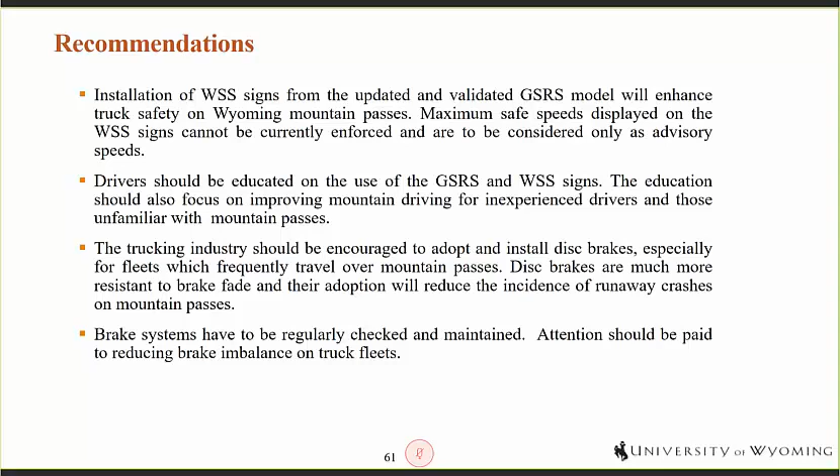The GSRS was developed primarily for trucks that have not been equipped with retarders. However, a substantial proportion of trucks on US highways have been equipped with retarders. These should be set to their maximum setting on downgrades, and then the truck should descend the downgrade at the highest speed displayed on the WSS sign.

So for this study, the test truck was fitted with disc brakes on the steer axle. However, the current penetration of disc brakes is about 20%. At the time this study was done, it was about 20%, and this is still growing. The GSRS will become more applicable to the US trucks as the penetration rate increases.

And so we recommend that before-after studies should be conducted after the implementation of the GSRS and WSS signs to assess their safety effectiveness. Also, feedback from drivers should be encouraged, as this will improve the implementation of the GSRS.

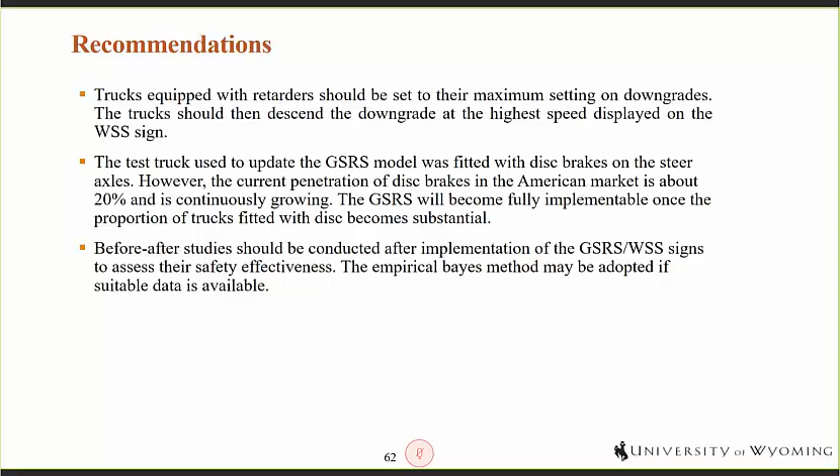So for future studies, more tests have to be conducted to validate the GSRS model, especially for higher truck loads and axles. Also, it will be important to validate the GSRS model for those trucks which are fitted with only drum brakes for all the axles. Also, to enable easy implementation of the GSRS, a software should be developed.

This will be very beneficial and make the implementation process very easy. Also for multi-grade hills, those hills with cooling sections and heating sections, with upgrades, level sections, downgrades all together in one downgrade, the use of the software will make calculations easy, because the calculations as we've done them do not really apply to these multi-grade hills. It only applies to single grades.

Also, the presence of curves on downgrades should be incorporated into the procedure for estimating maximum descent speeds. This can be implemented in the software easily. Then, like I said before, before-after studies should be conducted after the GSRS has been implemented.

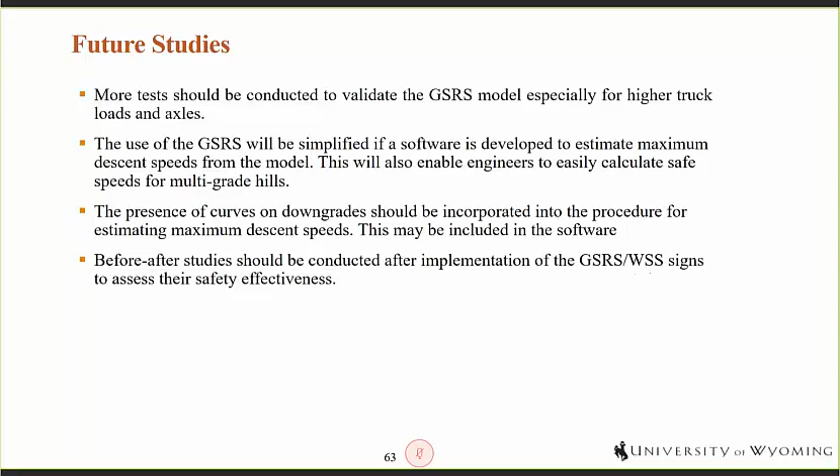So this is the end of my presentation. I would like to acknowledge the efforts of Admiral Transportation Company up in Worland, who donated their truck to us for us to instrument and conduct these tests. Efforts of Traffic Safety Coalition is also appreciated, and to our partners who funded this project, the Wyoming Department of Transportation and Mountain-Plains Consortium. They deserve a lot of appreciation.

Thank you, and I'll take any questions if you have them.